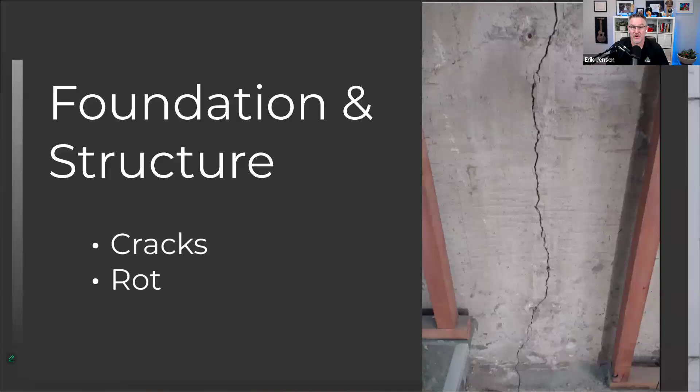You're not going to like to hear me say this, but look for fresh exterior paint. If the home is recently repainted on the outside, dig even deeper and look harder, because a fresh coat of paint can mask and hide really serious underlying issues—you can paint over rot. You can do it, you shouldn't, but you can. So if it's a fresh coat of paint, really scrutinize the exterior and get in there with a fine tooth comb.

As you're walking around, look up the side of the home at the soffits. Look to see any water staining or mildew up there—that's a sign there's some sort of water issue.

Same thing if you see any standing water on the outside, on the window trims or windowsills. These things don't mean you have to throw the house away, it just means you want to dig deeper and confirm there's no other more sinister issues at hand.

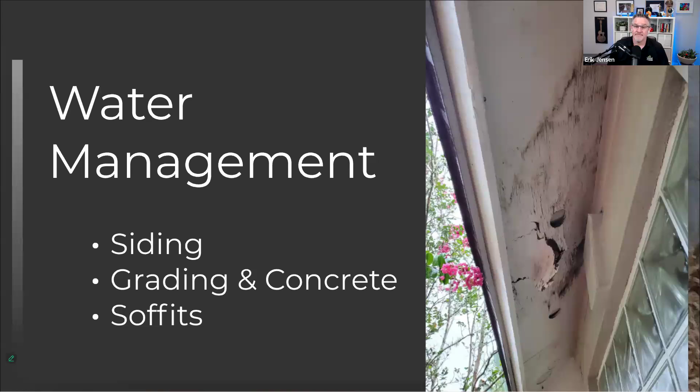That's about it for exterior on that side of things. As we're walking around the outside, we also want to look for any signs of oil tanks and failed windows.

On the outside of a home, a sign of an oil tank is, a lot of the time, a notch in the exterior trim that was the old vent for the oil tank. That's a visual indicator you can look for on the outside.

Be very careful that you're looking on the outside for any possibility that there is an oil tank. Now, if you're on the inside of the home—if you listen to nothing else I talk about today—this is important because we just came across this last week on another project.

Remember these two 1/4 inch copper pipes. Those were the fill lines from the oil tank to the old oil furnace in this home. If you see two 1/4 inch copper pipes like that coming out of a slab in a basement, you can be 99.9 percent sure that there was an oil tank on the property at some point in time. That is an absolute red flag for you to start digging deeper and ask a lot more questions.

Oil tank remediation - I think we could do another session on oil tanks and oil tank remediation. I could go on for a long time about them. I think we all know that they're bad news.

The other thing to think about and look for are foggy windows. The second you see a window with this kind of condensation in it, that is telling you that the seal has failed and the window is no longer performing at all. Basically you've just got a single pane window at that point. There's no energy efficiency being afforded to a home through this window because the seal has failed and it's no longer acting as a double pane window. Now you know.

Moving to the inside of the home, one of the things that you can do is walk through - what I do is stand up on my tippy toes and let myself drop right onto the floor. That gives you an idea for how strong the floor is or isn't. Is the floor always going to shake? Yes, it's just how much it shakes when you do it. If the person standing beside you just feels the floor vibrate a little bit, you're good to go. But if the floor shakes enough that they think they're going to fall through, you definitely want to dig deeper.

I can speak with absolute passion on that topic because we just finished a project that had that exact experience. You walked on the kitchen floor and it was crazy how much it bounced. It turned out it was actually structurally sound, but I was like, there's no way we're leaving this like that for the client. So the engineer came up with a creative solution to stiffen the floor joists. Especially in a home that's had any sort of renovations, that bounce test is going to let you know if some structural silliness has occurred.

It's a very polite way of putting that. I'm proud of myself right now.

Look for cracks in drywall, ceilings, and around cabinets. If you see any sort of hairline cracking, that happens all the time - settling happens. But any sort of crack that's an eighth of an inch or bigger is generally a really good indicator that there's some more sinister structural concern in place. You can also walk around the home and feel if the floor is sloping towards one wall or towards the middle. We've all been in those homes. So just another thing for you to think about.

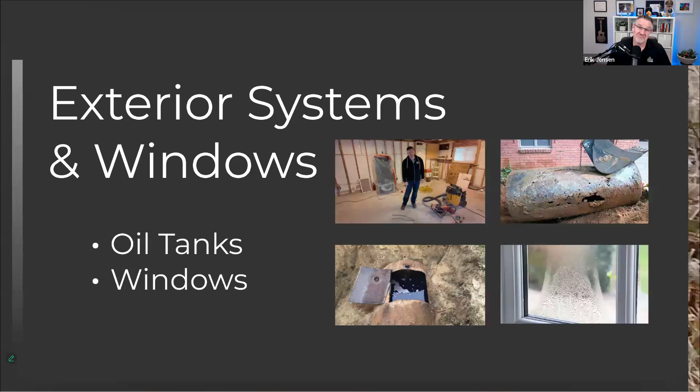All right, staying on track here.

Watch for sagging floors, ceiling lines, or headers above doors and windows. What I mean is, is the line above a window or door sagging - is it kind of smiling at you? If it is, that's generally a good indicator that something hasn't been engineered correctly. Depending on the length of the beam, some beams just sag under their own weight, and that's normal and part of the engineering process. But just look for excessive sagging.

Doors that don't open and close well is a good test, because if the door has stopped opening or closing, chances are pretty good when it was originally installed, it opened and closed just fine. These are all reasons for you to get inquisitive and start asking questions and figure out what's going on with that home.

In an older home, if it has an open concept, you want to make sure you've confirmed that load-bearing walls were properly removed and engineered when that work was done. As a guideline, a 2x10 floor joist has a practical span of about 14 feet. So if you're in an older home and a room is longer than 14 feet in both directions, get inquisitive, ask some questions.

Any sort of bonus room or converted space, like weird steps. So we were at a house the other day and there was literally a step up to the deck from the bedroom. Like, bedroom, deck.

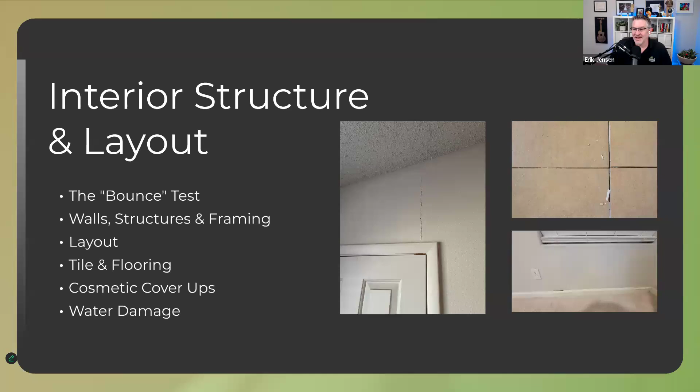Is there anything else I should be talking about on that? No, I think that's pretty good. We've covered all of that.

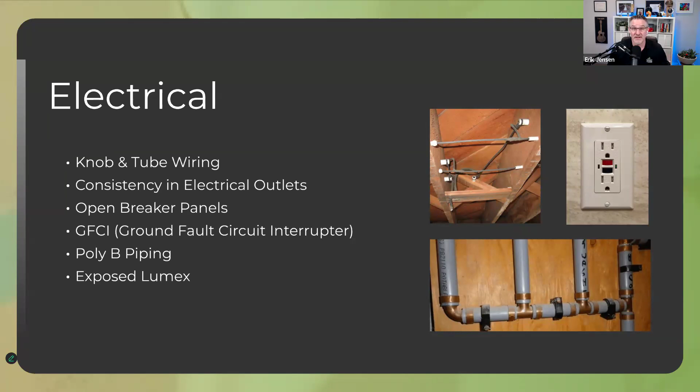Now, the other thing that we should mention when it comes to all of these sorts of things, especially poly B and knob and tube, is getting home insurance for homes that contain poly B and knob and tube is almost impossible. Most insurance companies will not touch those homes because they have such a high possibility of having future issues. So just be aware of that.

Not good, no good, garbage. Terrible. The reason being is stuff can collect in it and cause problems. So that's why it doesn't meet code.

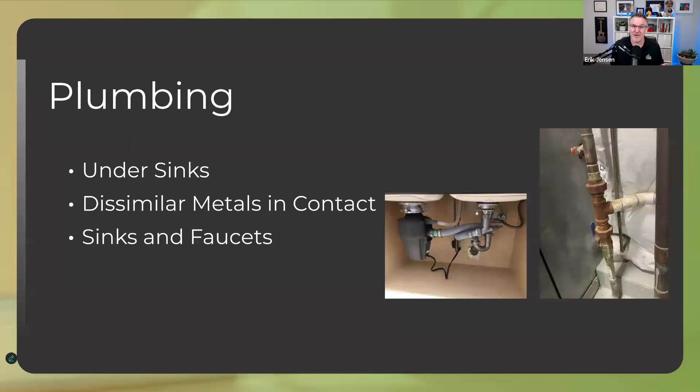But it could also mean it hasn't been plumbed properly. So if we see any slow draining sinks, tubs, showers, or toilets, we want to get curious, get inquisitive, and ask more questions to make sure there isn't something more sinister happening behind the walls. That's a really easy thing you can do with your clients. I think it'll make you look smart, and it helps a client feel like this person really cares about me buying a home that works and functions properly. So anyways, those are my 2 cents.

Now, let's talk about how to spot an illegal suite. Identify any bedrooms that have window openings smaller than 4 square feet. That's the amount of space you can get out the window. Building code requires at least 4 square feet or more for a human to get through, for fire egress.

A legal suite will have a dedicated electrical panel, right? It won't be connected to the home's main panel and all the breakers on the home's main panel. A legal suite will have its own dedicated electrical panel.

Look for smoke alarms that are interconnected between the suite and the main dwelling unit. Those all need to be wired together, because if there's a fire in the basement, the people living upstairs want to know so they can get out of the house as well. Very, very important.

A common thing you can easily catch to find the difference between illegal and legal suites is shared ductwork. A lot of illegal suites are still okay to rent out, don't get me wrong, but if you're trying to determine between legal and illegal, a legal suite must have its own electrical panel and its own heat source. It cannot share any ducting with the main dwelling unit. Really easy rule of thumb. The one exception is radiant in-floor heating, but that's not very common.

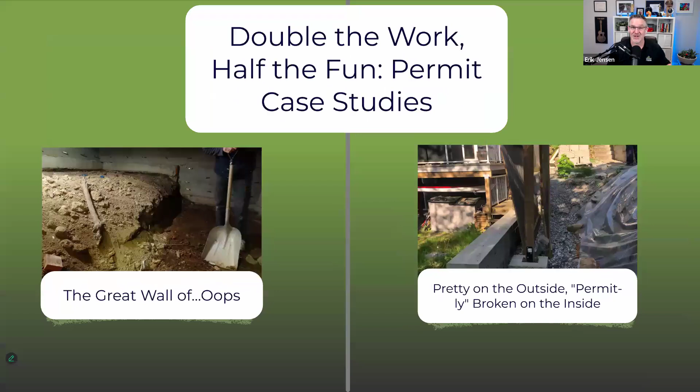So from a case study, this was a home we got involved in. The homeowner hired a landscaper to build a retaining wall. They spent about $70K on this retaining wall, at where that dude is standing. It was about 12 feet higher than the neighbor's property. Anyways, they never got any permits, no structural design, nothing.

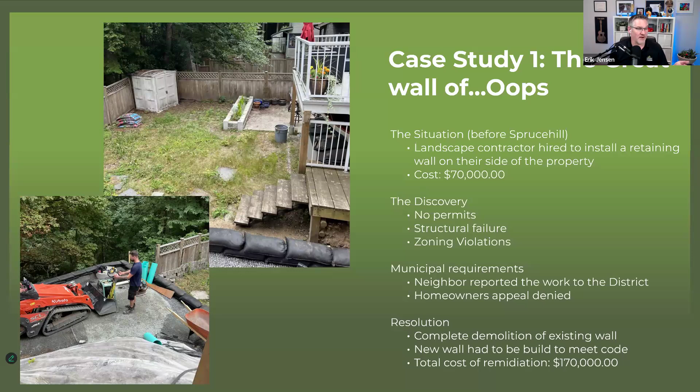Unfortunately, the neighbor saw that the wall was starting to bow and called the district. The district came in, and the clients were forced to tear down what was there and rebuild. So they spent 70 grand on the first iteration of their not-so-awesome retaining wall, and then brought us in to repair it and redo it. 170,000 was roughly what they spent to make it right.

So yeah, there can be some pretty significant repercussions for people that choose to do work without permits. This is a really good example of what that is.

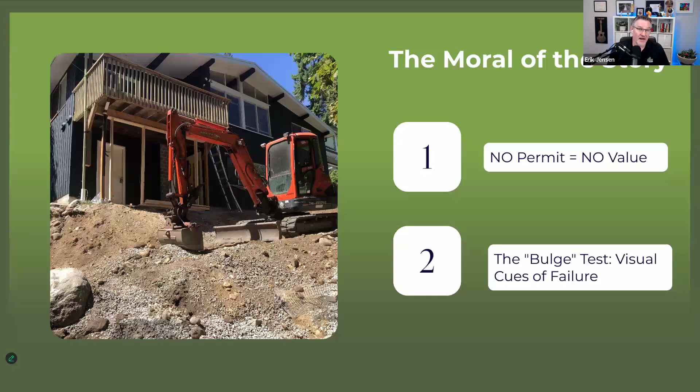This is another project we did. When you visited this home from the outside, everything would look really pretty and nice. But if you followed some of the tips and tricks I gave you already in this session, there were accordion drains underneath some of the sinks. There was some other goofy stuff going on when you looked at the window trims - they didn't look quite right on the outside. It turned out the person who sold the home had done what I'd qualify as a lipstick reno, putting siding over top of siding and doing a whole bunch of things that really didn't make sense and certainly weren't to code.

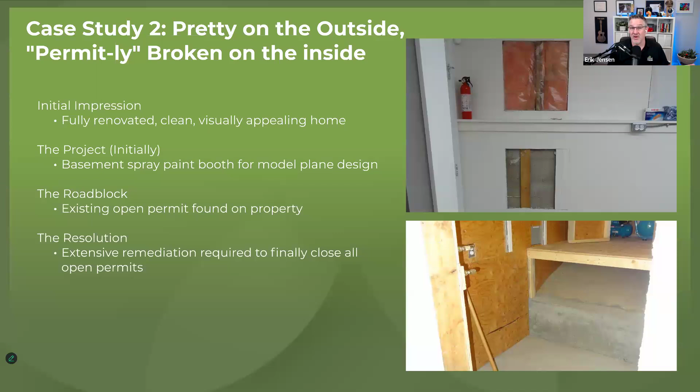This is another example - we went in to do some work for these clients after they purchased the home, and we needed to pull a permit for it, but their home actually had open permits on it that didn't get caught before the home transacted. We had to get this suite back into compliance with the District of North Van, I think, in this case. Major headache for these homeowners. All they did was buy a home that they thought looked really pretty and nice.

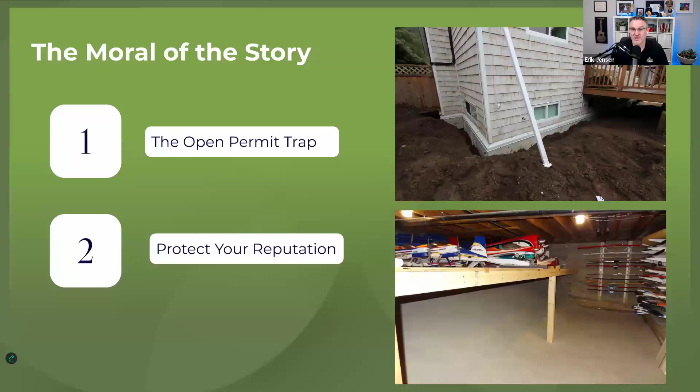Just be aware - so again, open permits, remember to make sure you're inquiring about any open permits. Your clients on the buyer's side are going to inherit the previous owner's shortcuts, so make sure you're protecting your buyers. Spotting a missing permit before the deal closes proves you're looking out for their investment and not just your commission. You can't see through drywall, but you can see through a city file. So being the agent who says 'the finishes look great, but the lack of a closed permit makes me nervous' - I think that's going to really help build a level of trust with your clients that cannot be touched in any way, shape, or form.

That's a wrap. Conclusions and takeaways: have that walkthrough detective mindset. No permit might mean no value. Spotting issues early is a win-win for you and your clients. Use the framework to inspect exterior and interior systems. Unpermitted work doesn't just add risk, it fails to add real significant value.

And that, Jenny, is all I have to say about that. I could keep going, obviously, I've got a whole bunch more rounds in the chamber, but I know we try to keep it to 30 minutes because there's usually quite a few Q&A on these things, a lot of questions. I have to say, I take myself off camera and mute myself because I literally laugh out loud when I'm listening to you. Does this look okay? Hell no.

Cracks me up. Before we get into the questions, I do want to make a comment - Doug made a good point in the Q&A about expertise. These type of sessions we're doing with Erik are meant to help you determine when you should be more curious than usual, as Erik said. But Erik has years of experience as a builder. He is a subject matter expert, and you are not.

Unless you are a subject matter expert on that, make sure that when you see the things Erik tells you to look for, you get more input from a subject matter expert like Erik.

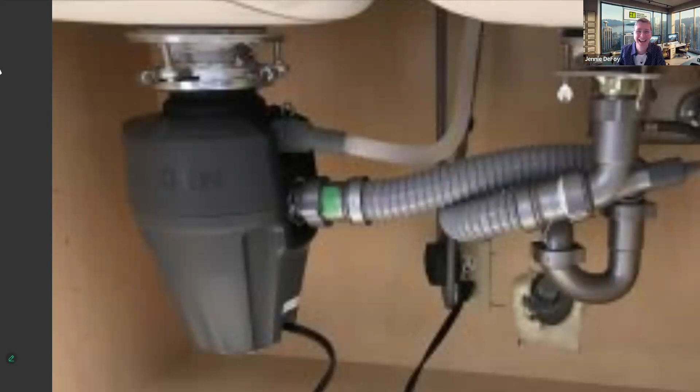Okay, you mentioned drywall thickness could identify if a suite is legal or not. What is the correct thickness? Five eighths. Thanks, Karsten, great question. 5/8 is the number. 5/8? Yep.

Excellent, thank you. Can we ask the seller if there have been any water-related losses - pipe burst, sewer backup, water overland, service line issues in the last 5 years? How do we spot any potential water-related problems in a house or building? I mean, asking the seller is the beginning.

Water staining is really the key thing - water staining and swollen materials. If you go into a home and the hardwood flooring is kind of lumpy, like at the joints, the floor is lifting up along the length of the boards, that's pretty much a surefire guarantee there was some sort of water issue in the past. What else? Swollen baseboards - swollen anything, drywall, baseboards, whatever, is almost a guarantee there was some sort of water issue.

Usually knob and tube houses aren't insurable anymore. There is one company that does something that makes it insurable - do you know that company and what exactly they do? No, I've never heard of them.